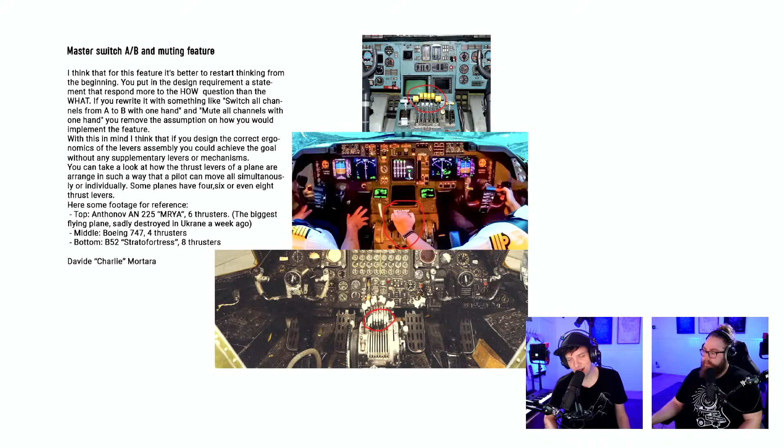Oh, so you want me to change something? Well, then let's change it for real, Martin. I'm like, in the color grade, the video is a little bit dark, and what I get back is a digital white image. Yeah, okay.

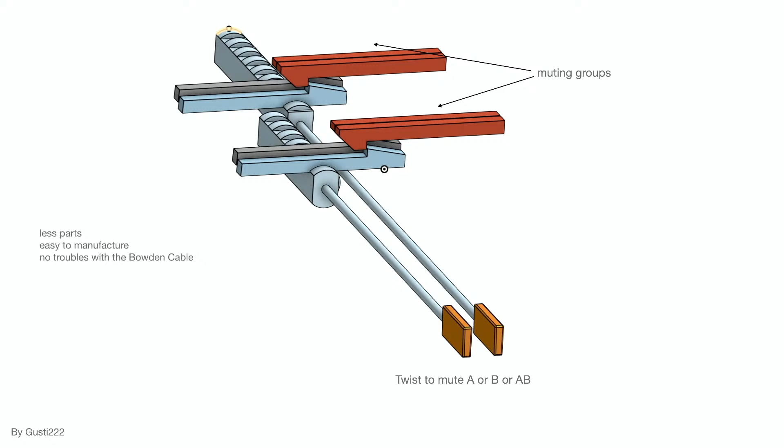From Gusti: twist to mute, A or B, less parts, easy to manufacture, no troubles with the Bowden cable. So Gusti, okay.

So this is an idea for how to do different instrument groups. What is missing in this idea, Gusti, is that we have at least 5, probably 6 individual groups. So your sketch has only 2. So when you start to put in 5 or 6 of these next to each other, you will run out of space quick.

And if I see it correctly, the genius thing with going into the middle to twist them is that everything can be on one axle. So in your design, you would need like 6 different axles, and the pivots would pivot on different parts of the links. You can already see it on the closest one that you're pivoting further back, which means every link has to have an individual design. So it's actually kind of harder to manufacture, I think, because they're not...

One design tenet that I think we should hold to in the Marble Machine 3 process is to have modules that can be repeated, the same part everywhere. And this would require custom parts, plus the fact that here the levers has to be physically connected at exactly the orange rectangular block point. So with the Bowden cable, we can put the levers anywhere. But still, I think your suggestion would definitely work, but I still think Bowden cable is simpler.

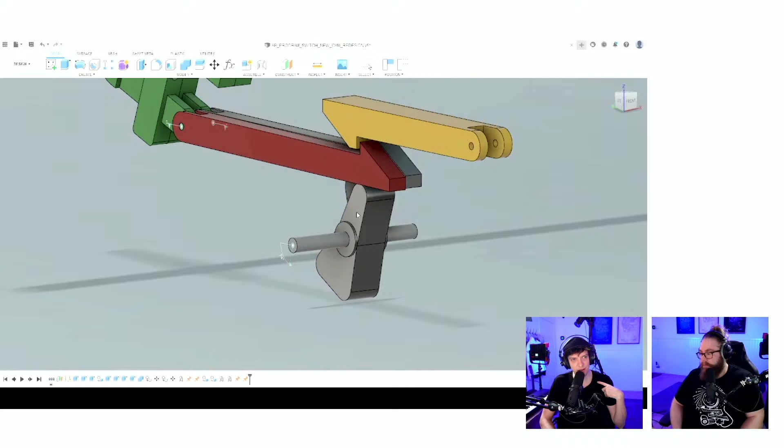So here we have the muting, and this is a video I think which is really nice. And they put, if we see, they put the A-B state on both sides. So there was a slide before saying there's no A-B state on a quick state. This is beautifully made in Fusion 360 with, I think, what is it called?

Contact sets. I love these animations when you're down, you have this person - who is it from? Sadly I don't see it here. Anyway, Golden Star, Gretzky Hall of Fame, brilliant. Because this person has downloaded the latest CAD from our website and animated something that helps me think. Very, very appreciated, beautiful. And this looks maybe like it's from the same person. Oh yeah, it's the same design. It's brilliant.

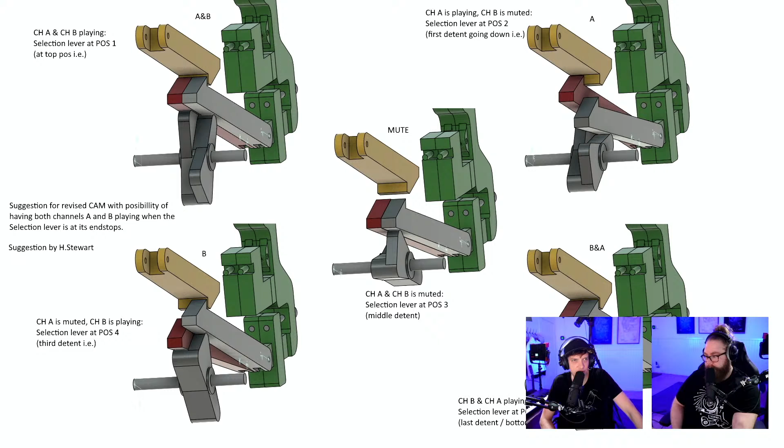Inside cam for car handbrake, lever to engage with to push either to A or B. Inside cam for car handbrake. So where... I don't really understand where on the machine this would sit, and if it's connected to the shaft of the cam or if it's a Bowden cable.

Jack Hainsworth - I mean this is beauty, it's a beauty. If the master lever has a larger range of motion than the separate levers, and the spring to return to center, it will not get in the way of the other levers.

The point here is that the master lever has to work so that when I want to individually switch program for the bass or mute the bass, the master lever can't obstruct that. This is a great clarification of that.

Gear, cable, axle. Here we come to the thing that a cable can't really push. Perhaps a hydraulic Bowden cable could. I've lined up our next live stream to discuss Bowden cables. I don't know how a hydraulic Bowden cable works or how expensive it is, so this idea would perhaps work with a hydraulic cable, but not with a metal cable inside a Bowden cable, because on a bike brake, the thing that makes the cable return is a spring that pulls the cable. You should always pull a cable, not push with it.

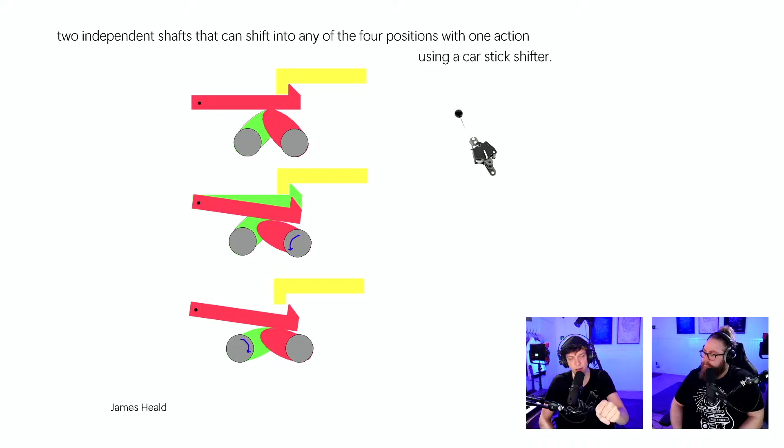If I think of a gearbox of a car, you have to think about what you put in. I think having one lever that goes back and forward and rotates two different ways is so easy: program A towards me, mute in the middle, program B all the way forward. I can go immediately from B to A, from A to middle, from B to middle. It just feels more straightforward.

A bigger radius enables different states to be closer - this is a super good point that's been made. What I mean by closer is that if you look at the blue and green lines, the angle is less, which means on the right side we need less rotation, less travel of the Bowden cable. Awesome illustration. Drop ball to mute, springs to center lever.

So this is the same - we need the tri-stable position, and it's a spring-loaded ball that clicks in place. We're using four steps, and this user has correctly put 'AB?' as a question mark. If we go to my iPad quickly, you can see Gretzky's suggestion. So AB is a big question mark.

I honestly do not think that we're going to allow the AB state. Let's go back to the sketchpad quickly - this is what we call a known unknown, and this is the topic of the next stream.

This is a known unknown that we have to deal with: AB state. If someone doesn't know what it is, let me make a quick demo on the keyboard.

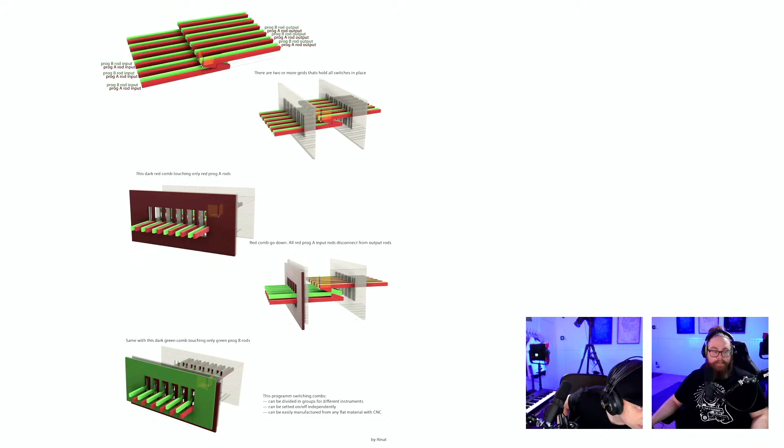Thank you so much. Okay, I have this one. Here we go. Ooh, can you make it larger? This dark red comb only.

Okay, the grids hold everything in place. Sadly, I can't enlarge it for you, my friend. Dark red comb touching only red prog A-rods.

Okay, so now I see your suggestion by Rinat. Cool idea. However, the genius of the Marble Machine X design was that this link, all these red and green ones, were only resting because of gravity, which means it can be pushed up by the action. So if the levers are resting inside the grid...

Because it looks like you're pushing them down, and then in the edge cases they can't - basically when you unmute exactly when a programming pin has activated a thing, it will get stuck, I think, in your design, because it can't swivel since you're pushing it down with the grids.

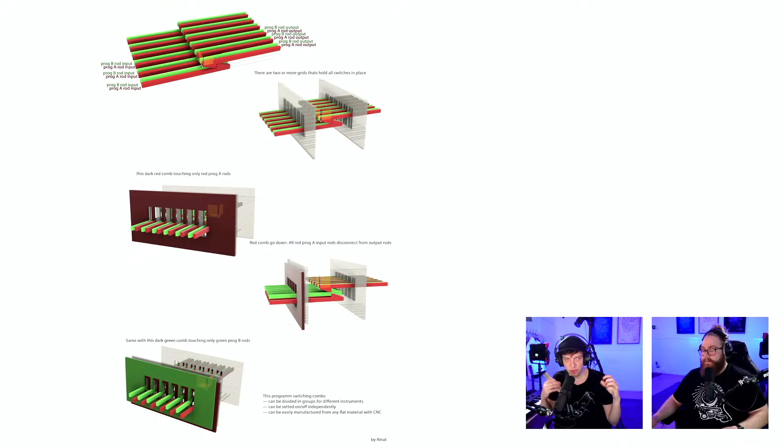So I think also it's more difficult to make this go up and down. Plus, when we want 5 instrument groups, there is no space between the instrument groups. We need to access it from the middle, and for your grids to keep together, it needs the side walls. That space does not exist.

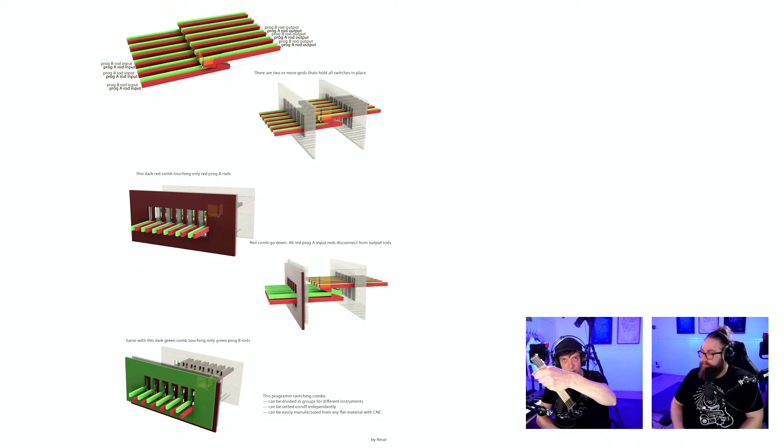I think actually your solution - if you remove the things on top and on the side, and if you only pushed from below with your grid idea, sliding up and down, this solution would actually work equally well as the camshaft. But I think it's harder to make one lever movement have 3 states, because the rotation gives us the 3 states, whereas otherwise I'd have to pull the lever, one thing has to come down, and then another thing has to slide up.

So there's 2 levers for AB. I think the one we have is simpler.

Do you understand it, Hannes? I can sketch it. Okay, or maybe you understand it. I understand it. Okay, I'll sketch it for the viewers. Do a quick one - 5 levers.

These are the instrument levers and the master lever. And instead of having these arms like this, the suggestion is to make the arms in here. Yep, and that would look more magic, because there's only 6 levers, but the last one is moving all of them. I love it, cool. Only thing is the master lever has to be chunky, because it's gonna take a lot of turn. Let's see the next design.

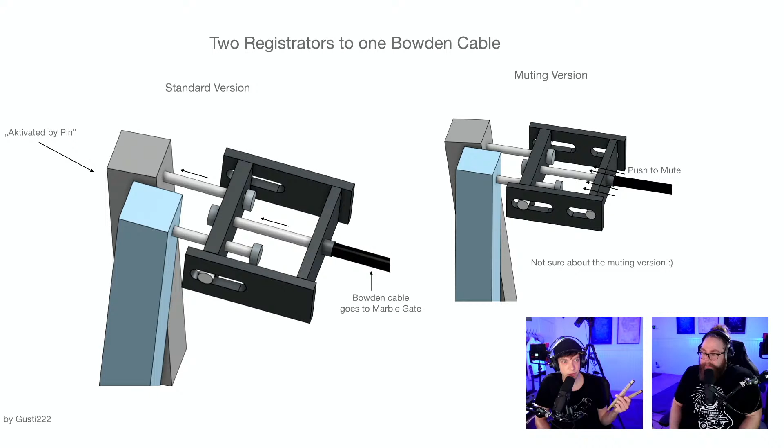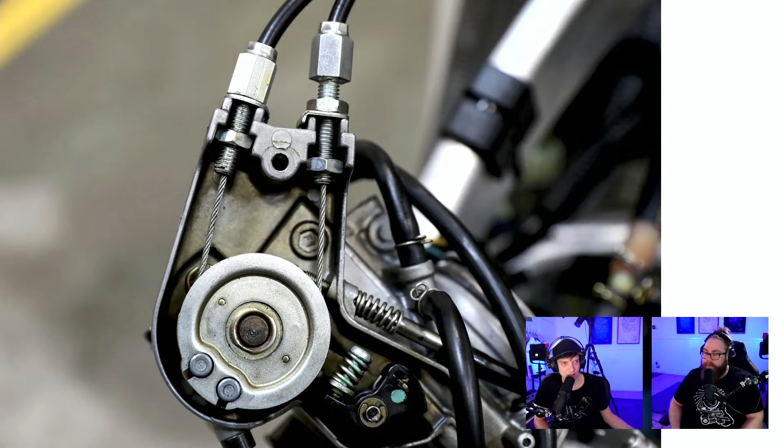Those are my favorite. Play A, mute both. Play B, play both. Okay, beautiful sketch with the yellow, but we have removed the play-both state. Mute both, same here. Love the sketches. And this one we saw, this is the MC throttle and the wheel.

Spring tension bar guided by a housing, channel on each lever with crenellations for indexing it. This puts the indexing a little bit further out, which I kind of like.

By rising or lowering the shaft, you can return to the same. I'm not sure I'm understanding this idea. Spring tension bar, guided by a housing. Do you understand? No, sadly.

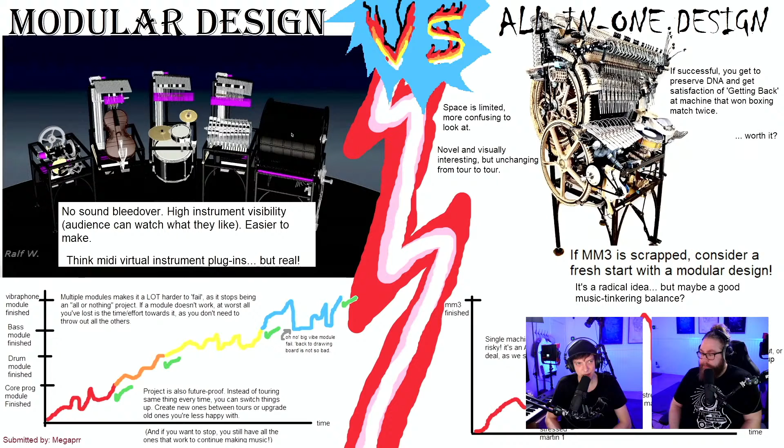I think the machine would be quite high, but it's a good way to get more room. Oh wow, here we go.

Mega PRR has made the most epic comparison between modular design and all-in-one design, and this is exactly where my head is, so I love to see some input on this. And there's a lot of text, but I think there's a lot of work being thought behind here. So let's start: modular design versus all-in-one design. On the modular side: no sound bleed over, high instrument visibility, easier to make. Think MIDI virtual instrument plugins, but real. And then we have a little graph.

Multiple modules makes it a lot harder to fail, as it stops being an all or nothing project. If a module doesn't work, at worst all you've lost is the time and effort towards it, as you don't need to throw out all the others. So to the left, you can see the different modules being finished. The project is also future-proof. Instead of touring the same thing every time, you can switch things up, create new ones between tours, or upgrade old ones you're less happy with.

So at the blue line, oh no, big vibe module fail. Back to the drawing board is not so bad. And if you want to stop, you still have all the ones that work to continue making music. It's super interesting to hear your thoughts about this.

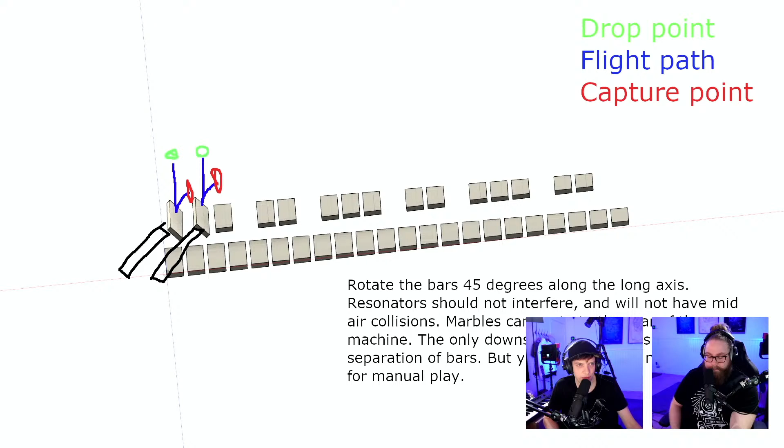It's getting a lot of traction out there. Drop point, flight path, capture point. Rotate the bars 45 degrees along the axis. Resonators should not interfere and will not have mid-air collisions. Marbles can route to the rear of the machine. Only downside I can see is slightly wider separation of bars, but you can keep the normal layout for manual play. Drop point is green, flight path is angled to the side.

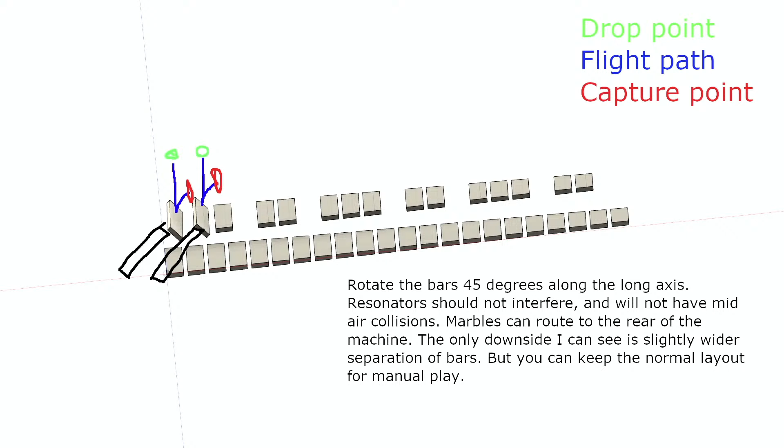Tricky part: how the vibrato shaft that goes through all the resonators is one straight shaft. How do we build the vibrato shaft? That's the trickiest thing with this design. Here, I think, is from Gonzonator, right?

Cycling the tempo would be one of the easiest ways to feed the tempo perfectly. Sometimes at the gym I do this cross trainer in time with the music, and I try to put one handle on the snare drum. I think this would actually work, but it's too much circus.

Exchangeable vibraphone section, including note plate and resonator pipes.

Yeah, the modular design is another thing. It might be less interesting, but it might be better music and definitely better sound. The modular design allows us to separate the drums away from the vibraphone, which will be wonderful.

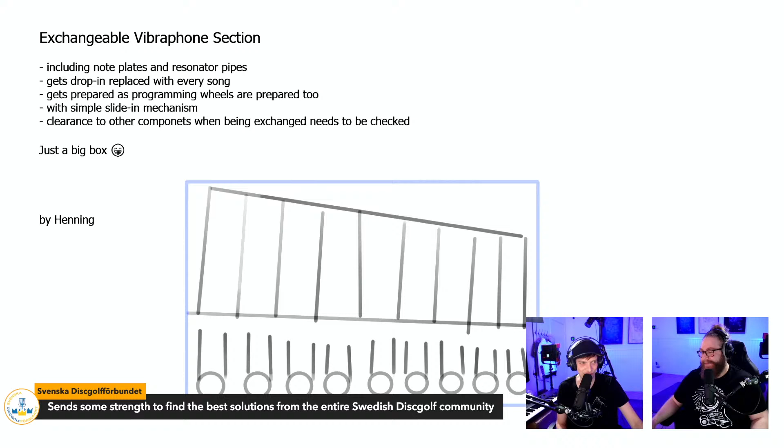Martin, here's a beautiful comment for you: Svenska Discgolfförbundet. Wow, so this is cool. The Swedish Disc Golf Society sends strength to find the best solutions from the entire Swedish disc golf community. I competed at national level in par SM once for Slottsskogen Disc Golf Club, and I was eaten like the goat in Jurassic Park by these players. I think I had a single match against someone who took European Championship silver, and it's super fun. Disc golf is just the best sport of all, so super fun to see you here. So nice, Swedish Disc Golf Society.

Exchangeable vibraphone section.

My mental game in disc golf was not good. I could do good in practice, and if I did well in a competition round, I just got locked up after half the round and threw the disc into the forest.

Okay, so this is a Mandracule module, exchangeable vibraphone section, including note plates and resonator pipes. Gets dropped in, replaced with every song, gets prepared as programming wheels are prepared too, with a simple slide-in mechanism. Clearance to other components when being exchanged needs to be checked, just a big box by Henning. This is a super good idea. This is what we call the Mandracule module.

Let me hang on, I'm going to find... not yet, but I am going to find our decision matrix. Some of you might have seen it. Let me... so it's, of course, in here.

So here we go. Your solutions are all these. See if I can get it a little bit bigger. Yeah, like that. So this solution is referring to all these Mandracule module things here.

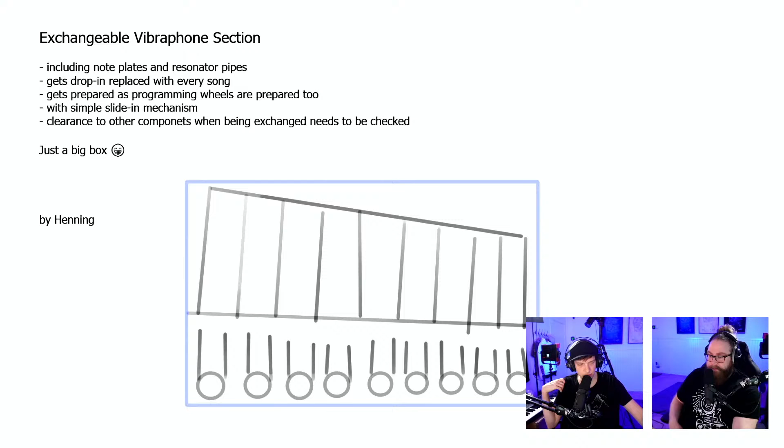I want a music instrument that can play. I want to make a real vibraphone with full musical expressivity. But I think I've realized that I can't have an all-in-one solution with that design requirement. So if I decide, no, we want to beat the old machine, we want to make the classic look, then this is going to be the solution.

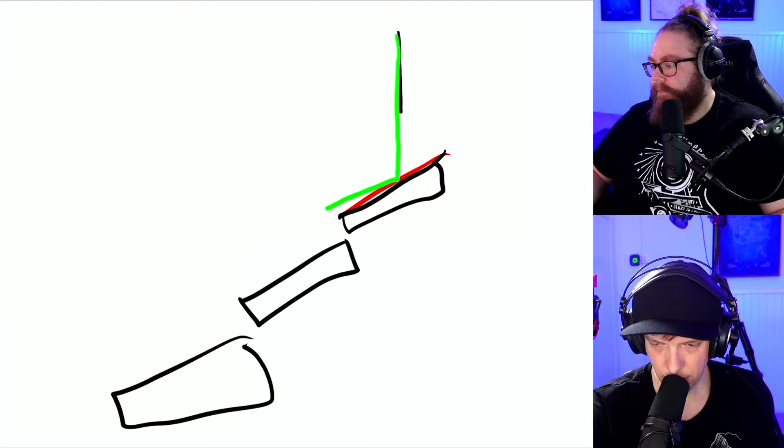So maybe let me sketch on this a little bit. I've excluded this idea from my head, and the reason is because I thought it's going to be visually too annoying. I thought about it like this, and I thought the funnels would be like this. But let's say, because we know marbles don't bounce really well on vibraphone, if we angle them a lot, and if they only bounce like this, then here it can bounce a lot on the drum.

The little catchers, represented by green, maybe don't need to be that high. So here you still have good visibility. So here is an eye. If I draw a straight line from the eye, you can see the bounce.

And if we make Sauron's tower here, Orthanc, and we'll put a little Frodo here. There we have it. Love it. Next design.

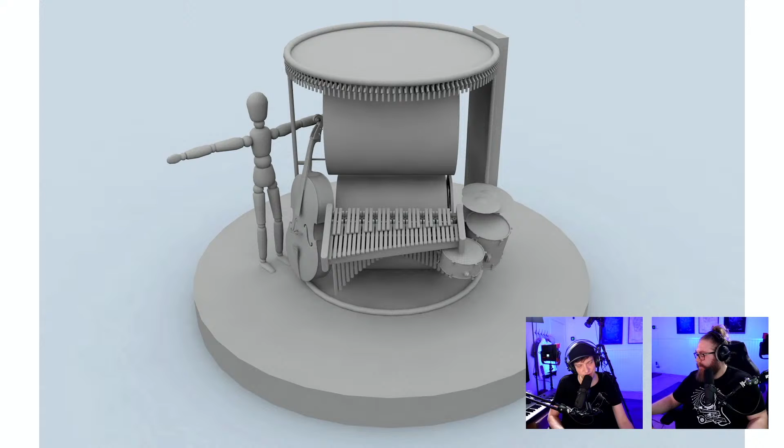So here is a rotating stage for visual impact wherever you're seated at the arena. This is a beautiful model. We featured this in the thumbnail because I love this model. It's so well put together as well. Just the visual impact of this.

I mean, it looks so cool. I don't know how it would work in reality, but the look of it is like, oh, I really like how it looks. Yeah, so when you see this, you're like, well, you do that, but there's no functionality in this model yet, so it's more form than function. But look at this, it's beautiful.

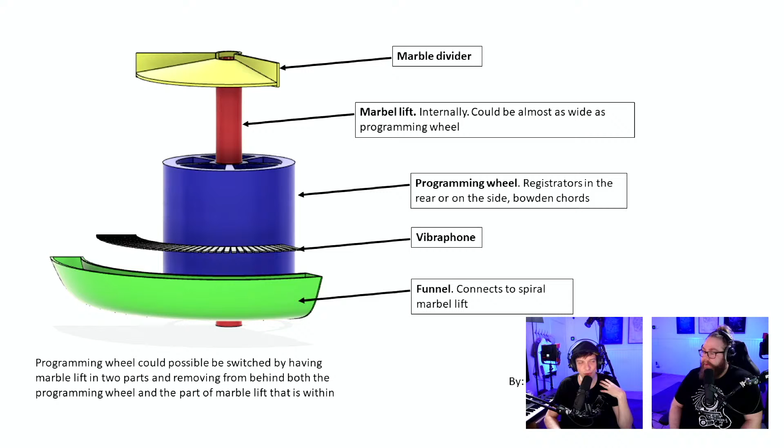But beautiful sketch. Vibraphone, frame, marimba. Have the ability to use the same resonator pipes but change the instrument from vibraphone to marimba. No, I don't like the sound of marimbas. It's the Lion King. No, it's the Little Mermaid.

So I'm only in it for the vibraphone. I don't like the marimba or xylophone sound at all.

So this is... thank you for the suggestion, though.

Drum, bass, keyboard. Vertical again, right? Yes, it's a vertical programming wheel. I think it's too difficult. I would like to see that with more of a granular sketch, so we can see more about how it would work. I don't see it working, but maybe I'm just stuck in my old ways.

Vibraphone placement to avoid mid-air collisions while keeping full range vibraphones. Extra note slots for note repetitions.

So the thing here is that you have collisions everywhere in this sketch, because I want to use 40 millimeter marbles. So let's just take the first white key up to the left, it would collide with the first gray key next to it. So the marbles are bigger than your center to center distance here.

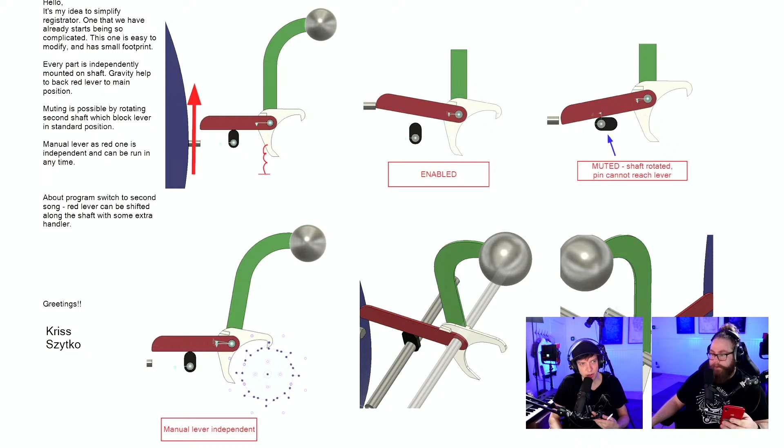So I think, Kriss, that your suggestion falls apart because you're sliding the red thing along the axis, and that will cause half hits and stuff like that. So the way we're now switching between program A and B is the only way I think that would work. But when I see your image, I hoped it would work. I don't think it would work to switch between the programs. Let's check the next sketch.

One Bowden cable enters, two leave. Ratchet and input allowed to flex out.

As the input is pulled, the cog spins 90 degrees. The lugs on the cog pull on alternating outputs every cycle. As the input is released, it is allowed to flex outwards to slip past.

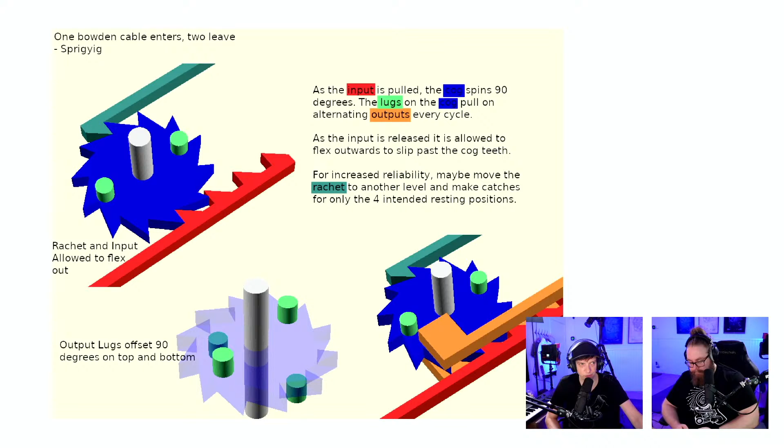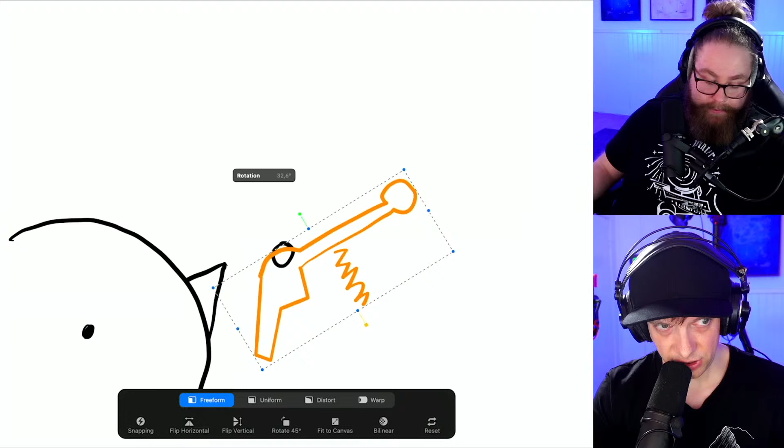So as you know, this thing, can I rotate it? Rotates like this, kind of. Tick, tick, tick, tick, tick, tick, tick, tick, tick.

Yep, I have it now. Okay, I'll take it later. Yep, because otherwise it's hard for the viewer to follow if I'm interrupting.

No. I'm in the wrong place. This is not for this. This idea is for...

This was actually an idea from the paper roll. When we were talking about paper rolls, here's a paper roll with holes, and it doesn't have a lot of force—you don't want to use a lot of force. Or the programming drum can be used as well. We talked about preloading this orange drum thing, so let's just make the drum here. Here's the drum.

So how do we preload? I'm going to make a red drum beater here, which has been preloaded with a spring force, and here it has been locked into some kind of latch. So you can pull out this latch—pull out latch equals boom, it plays. The problem was how to make this preload, but not make the preload happen exactly when the stick is going down, orange, to make a boom. Boom.

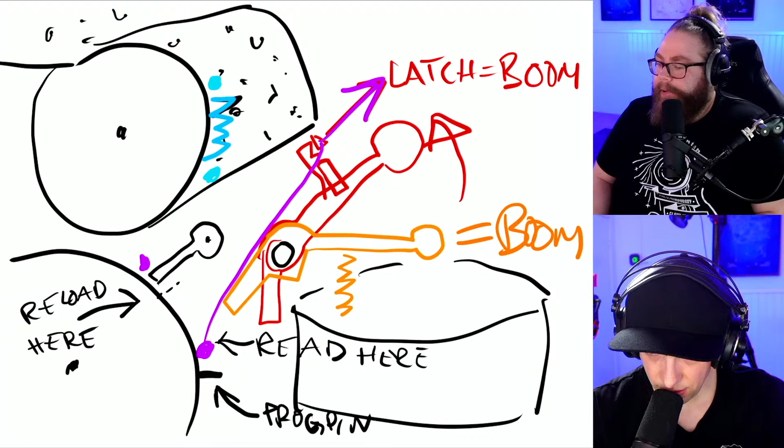Which means that—let me take a new color, purple—this reading here would pull out the latch. And this reading here would reload the thing. My sketch sucks hard, but the solution doesn't suck.

Did I make myself clear? You explained this to me prior, but I think the audience will get it. Let's see what chat says.

Let me make a custom note, because I think this is important—this has never been done, as far as I know, in the history of music. So, red programming pin is the read of the music program. Tick, tick, tick, tick. This goes to the latch that's pulled this way. Release.

Which means the stick—sorry, I run out of space all the time, why do I run out of space—the stick makes a boom. Afterwards, the same programming pin becomes orange, and it's read again. So we create another mechanical movement, and this is reload, which means the stick goes up in tension again.

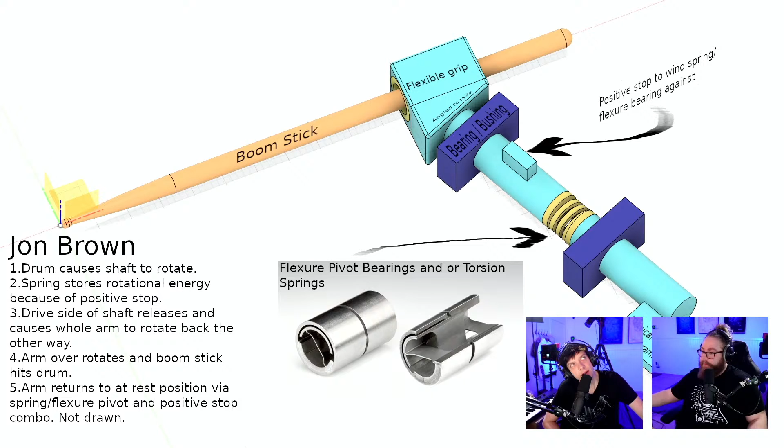Angle to taste, flexible grip, boomstick—I love the term boomstick. Boomstick. This is my boomstick, it looks greater. Arm returns to rest position via spring and positive stop combo, not drawn. So I'm wondering what the difference is here between a normal spring. Oh, that's a pivot. Robert Towell.

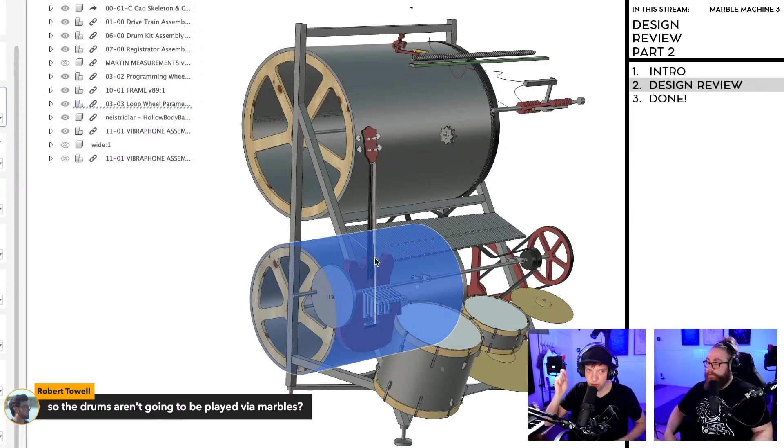So the drums aren't going to be played via marbles only—the idea is to have the loop drum. Let's go to CAD so I can show that. Robert, the drums are played both by this lower wheel in a loop that goes with 16 beats, and by marbles from the big wheel that goes 64 beats. So basically what you can do in this design is a loop of the drum, but then you can add marbles that fill in there—that was the marbles. Yeah, so both is the answer. Next design.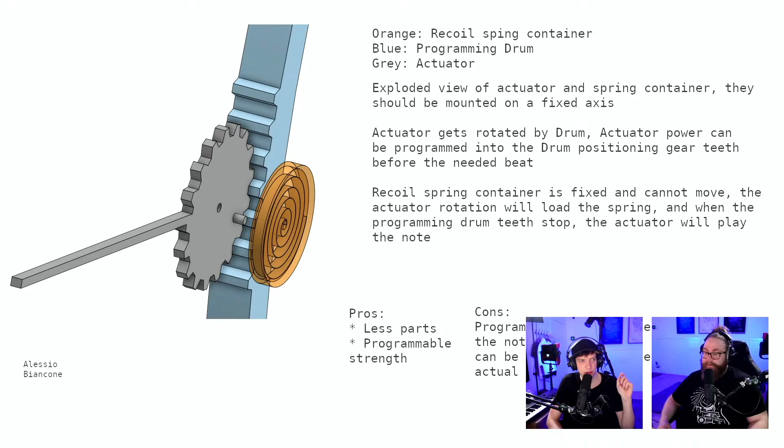It's a nice one, only one spring for both directions. This is the same idea Alessio Biancone had, with the coiled spring here, using a torsion spring or coil spring instead of two extension springs.

It's interesting - problems with current drum beaters and the desire to play dynamics, by Peter O'Neill. Sounds like a little essay. I love it. When only partially muted to play quiet, spring tension is less, the activator lever hits less on the programming hill thing, and the drumstick starts further away. These added together will cause drastically different timing.

You're absolutely right - other solutions won't work due to changes in release timing, suggested in my own head and by others on the stream: adjustable length of the registrating arm, adjustable height of spinning hills on the programming drum. The adjustable height of spinning hills is my favorite solution, but I've also been thinking - what would it do to timing?

Can I see what's written there under us? No longer the same piece of metal as the registrator - unfortunately I don't have a way to make this yet, but maybe better minds can get there. I love the humility of pointing out errors while acknowledging you don't have a better solution. Somehow this angle needs to be adjustable only by moving the starting point of the registrating arm. This will keep the starting point of the drumstick fixed and the release point of the registrating arm fixed - only the tension from the amount of pullback will change.

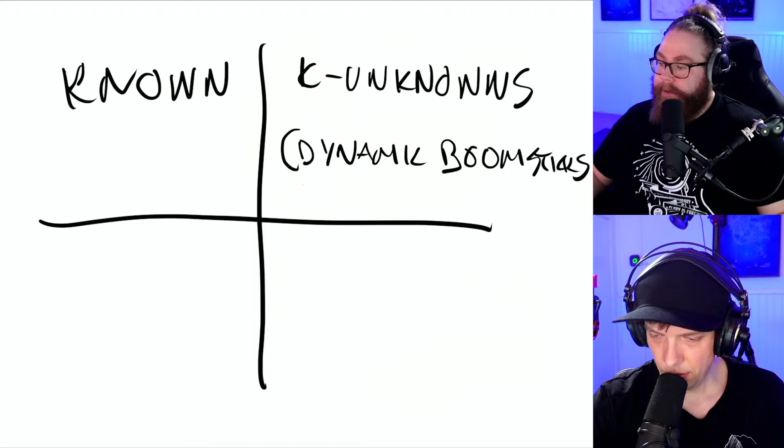This is the topic for next stream - we have a couple of known unknowns with dynamic drumsticks, as they're called nowadays. I'm happy you pointed it out, because this is something we have to deal with and think about in the next design. Lucas Wendel is in the chat: you can compensate for the difference in timing of the different height ramps depending on the way they are actually manufactured. Great point, Lucas.

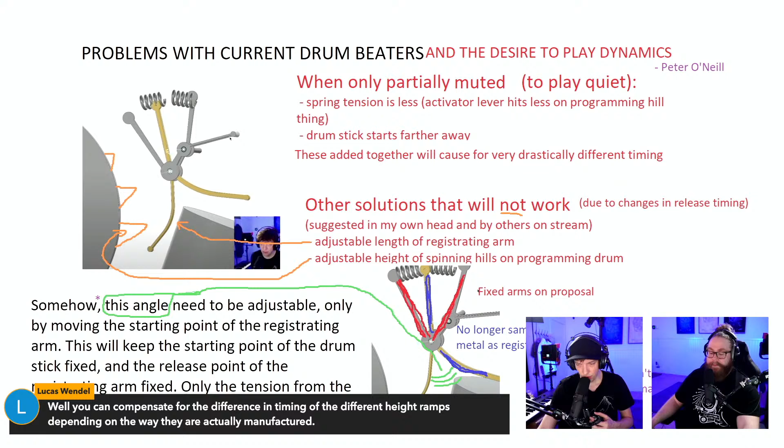Let's sketch that. Since we'll be able to know exactly - here is the exact point. You would think that someone like Lucas, being so smart, has a whole mechanical music instrument museum to derive this kind of deep knowledge from. So here is boom.

This is exactly 10 centimeters from a certain point here. Then when we want to make the soft note, the red triangle that is much lower, we can make this distance 7 centimeters from this point, and this point is the timing point. So we can actually learn the mechanical difference by trial and error, and have these triangles - on this triangle you can say like a hardness rating, maybe it says 'soft' on it, and that soft thing is shorter to offset for the slower hit. Lucas solved it, which means we can move it from the known unknowns into the known, and we're getting there.

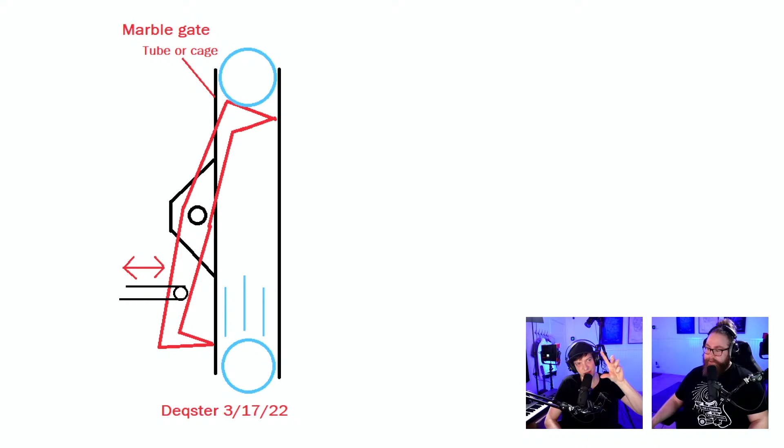I am like - no bad suggestions? Hold my tea.

Dual channel clock escapement gate. Two dropper wheels on the same escapement.

I've seen this a couple times now, from Enoch Daniels. The reason we have only 8 marbles is that Rosero figured out that leaves the marble dropping to be the most secure because of the angular rotation. On this wheel, every marble will just rotate a little bit to be dropped. And as the sign on our wall here says, what would Rosero do? So we should not mess with perfection. So Enoch, thank you, but Rosero have made it otherwise.

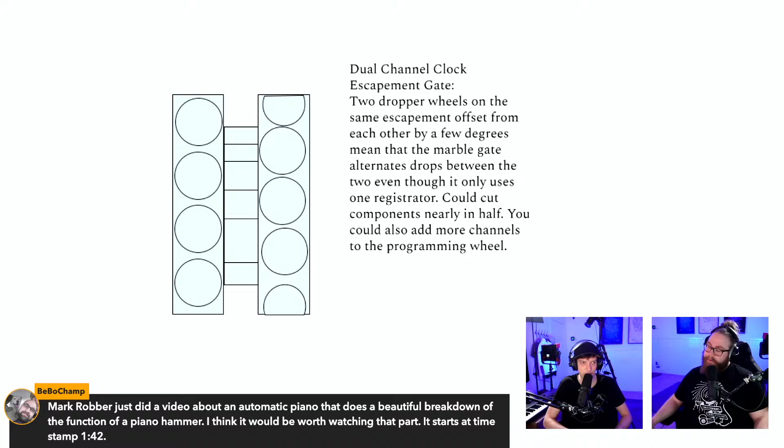BeBoChamp, Mark Rober just did a video about an automatic piano. I saw it actually, it does a beautiful breakdown of the function of a piano hammer. I think it would be worth watching that part, it starts at timestamp 1:42. Mark Rober's videos are amazingly well made. I saw the video actually, and I also thought it was a great demonstration of how boring it is with solenoids. I mean, the piano was super impressive, but just putting solenoids, it's a one-trick pony, I feel, and you get bored of it very fast. But it was beautiful, beautiful, beautiful, and very quick.

Two gates dropping on the same key to avoid doubling keys. You don't drop in the center anyways. Always open gate 1 first, fall slower than gate 2, so ball 2 cannot catch up and collide with ball 1.

Mad props for your photo editing software here. Yeah, is it Paint? Paint or early Photoshop? I don't know, it's beautiful. It's beautiful. From Induni. This is basically exactly what we're going to do. So we are going to do that.

Inverted belt drive for marble gate from timing wheel, by Jared. So I think this is an extra part. We do. Yeah, I think it just adds too many new parts.

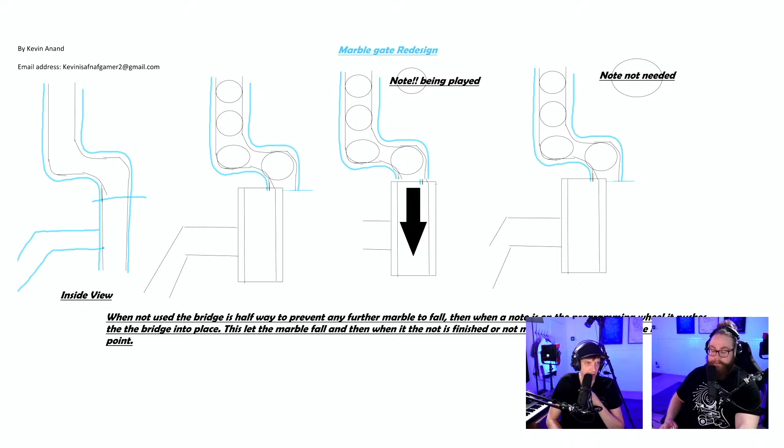This is very much what we had on the first gate on the machine. Oh, can I read the text? When not used, the bridge is halfway to prevent any... no, it pushes the bridge in place. This lets the marble fall, and then when the note is finished or not needed, it moves back to the halfway point.

Yeah, it looks like the gates that I had on the Marble Machine X. It's actually the gates that are on this image. If we go to my CAD, these are actually the gates, and as you can see, gates are not reliable. So the clock escapement gate or the Pac-Man gate are superior in almost every sense, I think.

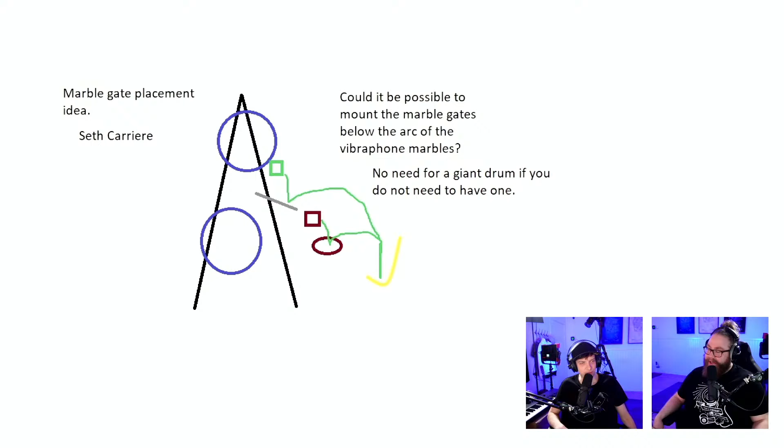Do you see what I mean? Oh, yes. Yes, please. Can we get to that zone? Everything convoluted on top of each other is causing us so much headache.

The Havoc machine. If you rotate... oh, we saw this one before. This one we checked before. Oh.

Love it. Drop caught by fabric funnel, Vibraphone backup. Drop caught by fabric funnel. This is basically exactly how I've been imagining it. And I think this is going to be so ugly, except if we make it circular. Then it would look like a beautiful ballerina skirt almost, or like an upside down mushroom.

So this is how an idea should be presented. Like I wish I could sketch this clearly. This just tells exactly, this is a brilliant idea. If we would want to do this, it turns around everything that I thought of. I had it all the time turned around. It's a great idea if we want to make the convoluted thing.

Where's the resonator pipes though? That's the thing, here it looks great, but what's missing? The resonators are missing, and they would make everything impossible. So, good idea, but I don't think it's working.

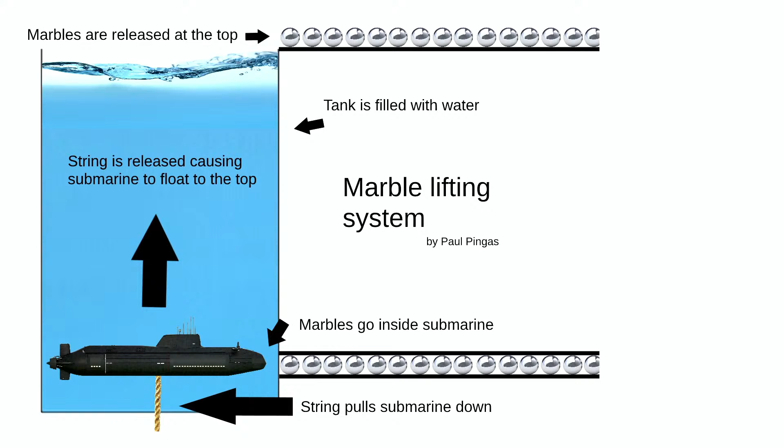Brilliant. Oh, we didn't give credit on the last image. Sadly, no credit. Paul Pingas. The case for constant drop height by Rare Earth.

So these are some mathematics to prove that if we don't have constant drop height, and if we make modules, what can we have? Constant drop height. So I think someone has done a lot of thinking here. Let me drink some water and actually go through this and try to understand.

Because these graphs, these formulas, what is it called? Mathematical functions, formulas. It's fun that the cartoons of us are smart. Hey, the smart people are back. We know what it's called. It was the cartoons who didn't know what this is called. It's called equations, okay.

I just want to once again here with all the talk about the piano hammer - Kevin Mullart, I concur with B-Boot Champ - not the solenoids, the design of the piano hammer as an inspiration for a drumstick seems like a good idea. Other people in chat are also plus one on this idea. Check out how the piano hammer works. The piano hammer has a very cool reset function. I've been repairing piano hammers on my own pianos, but I haven't thought about it for a long time, so definitely a good idea. Thanks for pointing me to it.

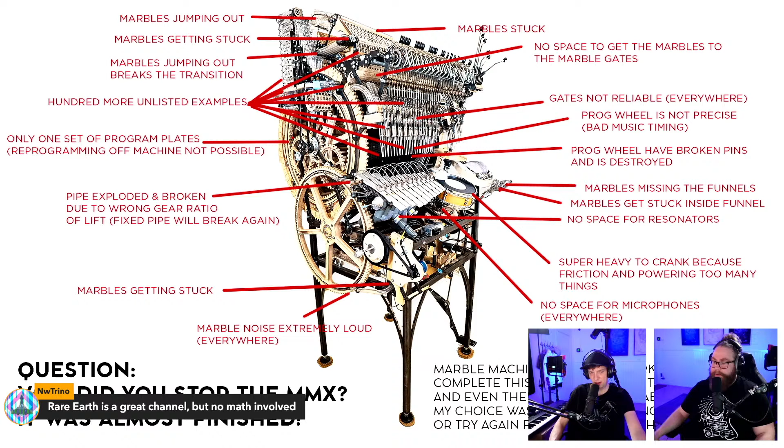So this is where this gets super, super fun. It's almost like a mathematical proof on why a design requirement should be in the design requirement document. So I'm going to just improvise here, impromptu - marble drop height.

And registrator timing. As proved, we have to rewrite this by Rare Earth. Similar, same drop height is best for timing.

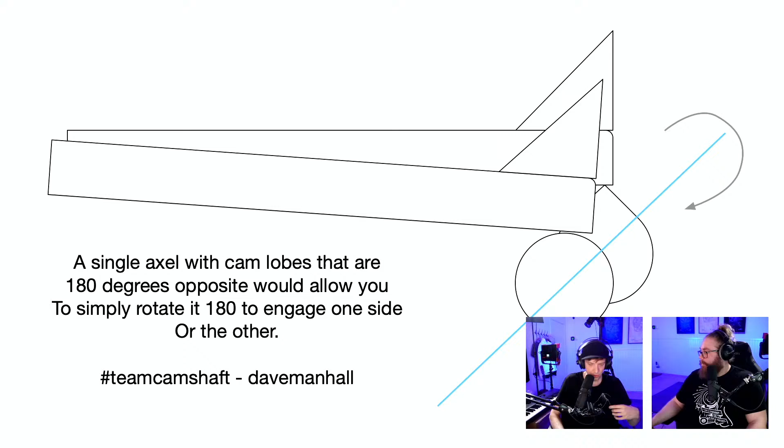I think it's a good idea. Next design: AB programs and muting. Pink axle inside holes, green one. So controlling AB channels and muting would be done by 2 levers rotating the pink and green axles at the side of the machine. This is the pipe solution, and with 6 or 7 individual instrument groups, things are starting to get too complicated. But thank you, Alienator.

Muting and track changing: registrators are always engaged, only the connection to the gate is cut off. This mechanism was in the other old machine. Each track has two registrators for changing the music.

From Inuyasha, shoof - like Gretzky, skating where the puck is going. This is exactly the solution we came up with, and you reached it independently. I'm super impressed, this is the solution that works. Well done. There's more from Inuyasha.

While unmuting, the gate connection comes down but does not transfer movement - yeah, this is the same solution. I'm super impressed that you got it. Muting and track choosing, it's the same.

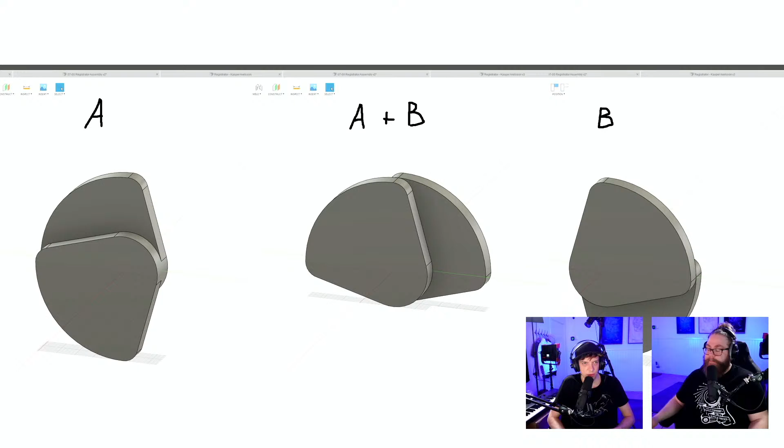Here we have more camshaft things with the AB state that we've now excluded. But thanks for the sketch.

Here we have a Bowden cable lever, I think, for overdubbing. This is how the cable goes back and forth.

Square bar with identical cam profile, stacked and rotated depending on what channel it corresponds to. Love it, easy to manufacture. And it's from a Swedish person, I think, because you can see some Swedish on the box. So thanks from a fellow Swede.

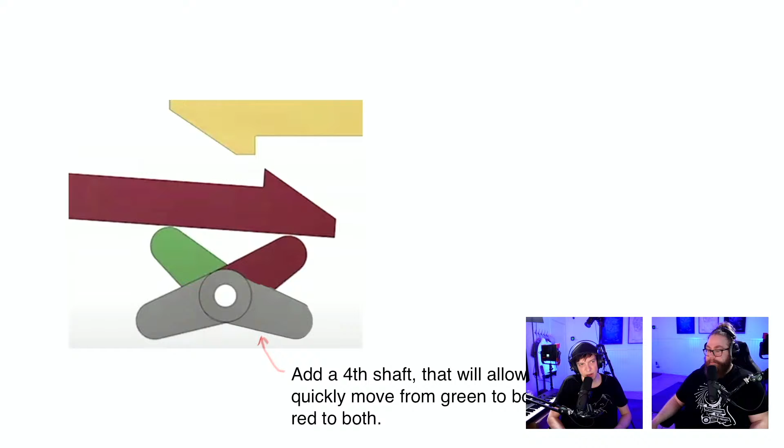Add a fourth shaft that will allow you to quickly move from green to both, and red to both - so the both state has been cancelled. We don't need the green parts here in the picture, but it's a good idea if we need that state.

Oh, it's a video, I think. Okay, let's see the video.

I love when people are using Lego. What? Beautiful. Also, this is the train thing.

Wow, cool, it's the master lever thing. I love the straightforward examples - you have an image immediately after. Thanks so much for that. There you have it, master lever levers. Beautiful demo, thank you so much, whoever it was from.

Channel 1 playing, both channels muted. Channel 2 playing - how is this? Channel 1 playing.

Oh, they cross each other. That needs two pivots, more complicated, I think.

Did we see this before? No. Use a detent to give feedback on the rotation - yes, that's the ball, that's to make the lever stay in the correct position.

To determine the muting state of what is playing, use a machine rod shaped such that its rotation determines whether B is muted. Yes, I think this is spot on - this is what we're gonna do.

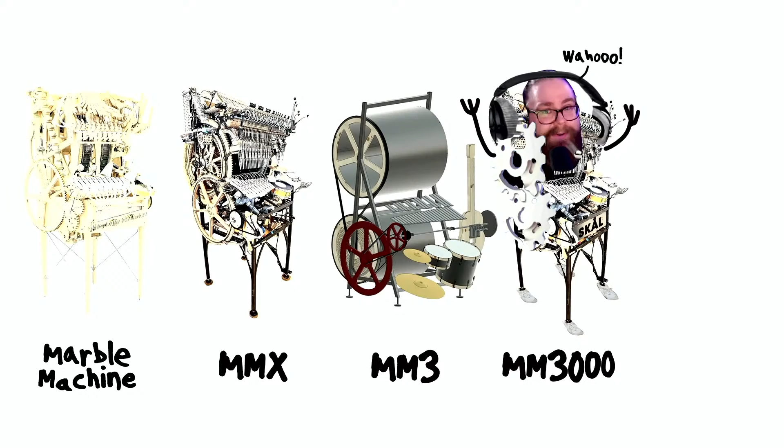Oh wow, how did this slide manage to get on air? I don't know. Everyone knows that the best way is to have MM3000 just spitting out the marbles at the correct place. And it also says Skål on the front. Wahoo, Marble Paths, previously. Let's see, this is a beautiful sketch. Can we remove we ourselves? We can.

Splitters and mergers caused issues and added complexity. Lift limit notes count, marbles hard to catch. One lift per gate, no splitting or merging. Reduce the height to the minimum to play the note. Pros: increased reliability, high marble throughput, compactness.

So my take on streamlining the design and removing parts. Bonus cool points for you if you can make a one-plate gate and lift assembly. One-plate gate and lift assembly.

So the idea is to have isolated loops, which means that the bass notes only go into the bass marble lift and the bass marble gate. So you have isolated ecosystems. Snare marbles go to the snare. The only problem with this is that you have to catch them accurately. If I play this note, it cannot be caught by this funnel which is next to it.

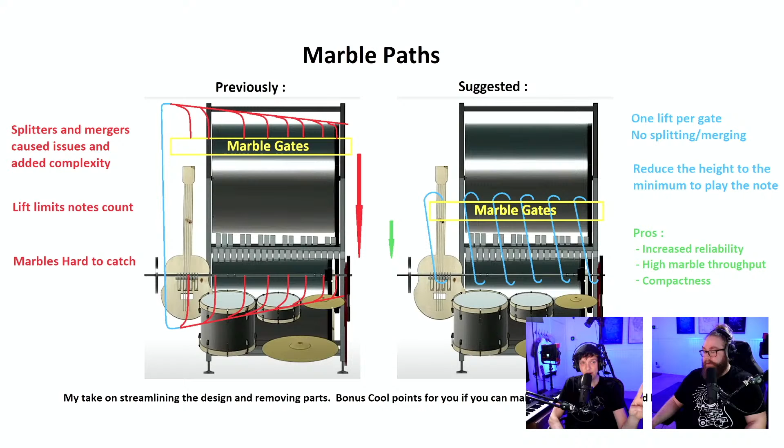So my idea for the Marble Machine 3 is to only have one large funnel, and then we need the marble gates. But on the project we've been working on during the break, the Marble Machine Maker Kit, we tried to have isolated loops, and it worked really good. So it's a good idea, but it takes - the lifting system will be much larger, and the capturing system needs to be completely exact.

We have to catch each marble into its specified marble funnel. That's difficult. I just want to say, Doro doing the Lord's work here. When people understandably question why the MMX was not pursued anymore, Doro pointed those people to this link. Please have a look at wintergatan.net pages and MMX. There you find the explanation why the MMX was not ready for performance. Great job Doro, thank you so much Doro. And at Kvijung, we really understand that people are wondering, so I made that picture exactly for you. Go there and you'll see the explanation. Yeah, some of all the problems.

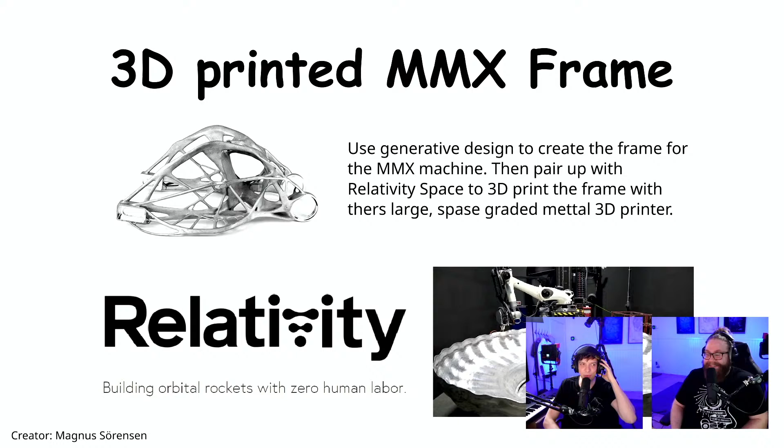That's not all, no, not those that fit in one picture. So here's a suggestion for a mini camera for video, and here is a suggestion to use a relativity space to make it organically created. It's from Magnus Sörensen again, who had another suggestion earlier I think. So these are space grade metal 3D printer parts, probably super cool, but very, very custom and a little bit nervous about probably not really cheap. Repairability and maybe a little bit expensive, but metal 3D printing is the future, guaranteed.

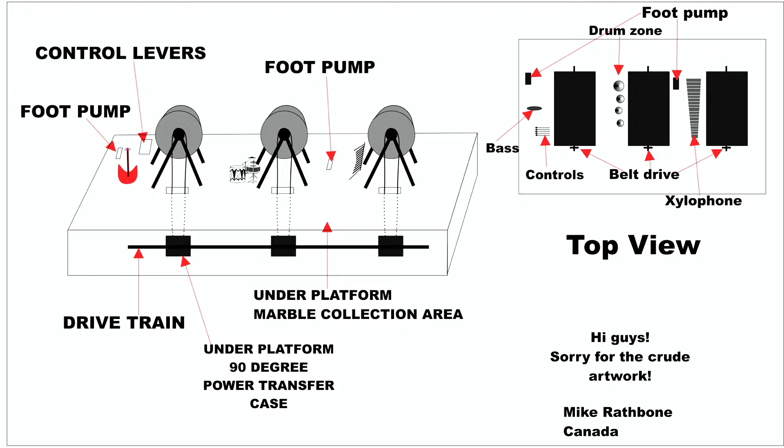So Mike Rathbone - hi guys, sorry for the crude artwork. Your artwork is beautiful, I have one big criticism though: xylophone, we're not playing xylophone, we're playing vibraphone. What was the name again? I missed it because we're over it now. Mike Rathbone, yeah, love this sketch Mike, thanks so much for sending it. And I mean, talk about visionary thinking.

And so the shaft that connects all the machines, you could actually have it above in the air as well. Super, super cool. And Ralph is here yet again with this wonderful modular thing.

Okay everyone, we are going to a smaller problem, but one of the most inflammatory ones. So Damián Vila has made a beautiful presentation of this totally overkill programming pin, suggesting instead of removable pins, using integrated pins with latching mechanisms, like a retractable pen.

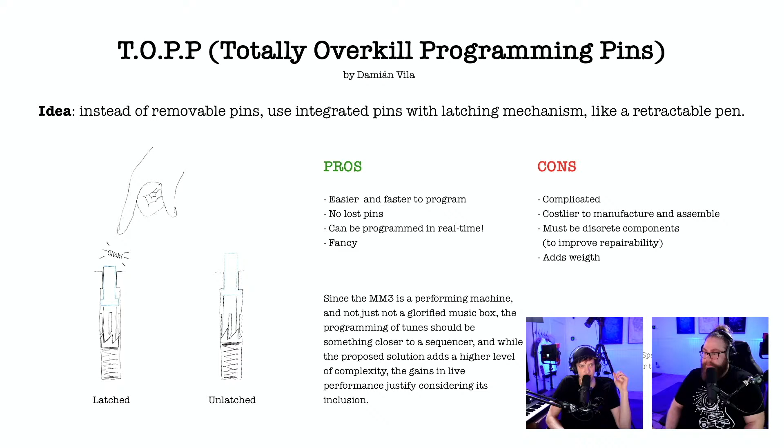The reason this doesn't work is that we need 50,000 instances on the programming wheel. The concept is brilliant, but it will be way too hard, right? There's just too many, they can't fit physically on the machine, and 50,000 of them, etc, etc.

With a programming wheel requiring cutting to program it, it is harder to experiment. Oh no, that's not true - when we do cutting, we can put a pin anywhere. So the cutting is just a template, it's a white sheet, so you can make any kind of music.

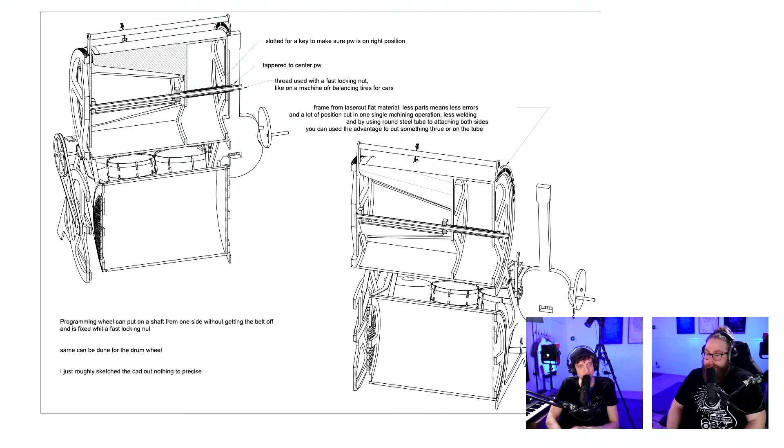Here we go - mechanical means no electronics, so that goes away. But thank you for the beautiful sketch. And this is beautiful.

So is this still the removable programming wheel, or is it moving sideways? The programming wheel can be put on a shaft from one side without getting the belt. Same can be done for the drum wheel. Yeah, so this is the old design - we've moved forward from this. We're actually removing the gear with the programming wheel.

And here's a cool kind of thing - a programming sheet, so we're not doing... oh well, this is great. This is a template made from a durable material like Tyvek and printable on a large format printer to aid in programming songs. The sheet is relatively inexpensive and you can have multiple copies in case one is damaged, lost, or given as a souvenir.

Sheet registration feature on drum - this is from Robert Thompson, Fort Collins, Colorado.

There's going to be a South Park concert in Colorado. Sir 3K just informed me, with the band playing the South Park theme song. Yeah, so if you're in Colorado, maybe check that out. I think it was in Colorado. It should be.

This is exactly how I'm thinking that we should use it. So this is just for the programmers to know where to put a pin in. The sheet can be automatically generated with software from a MIDI stream. Manufacturing requires cutting each hole.

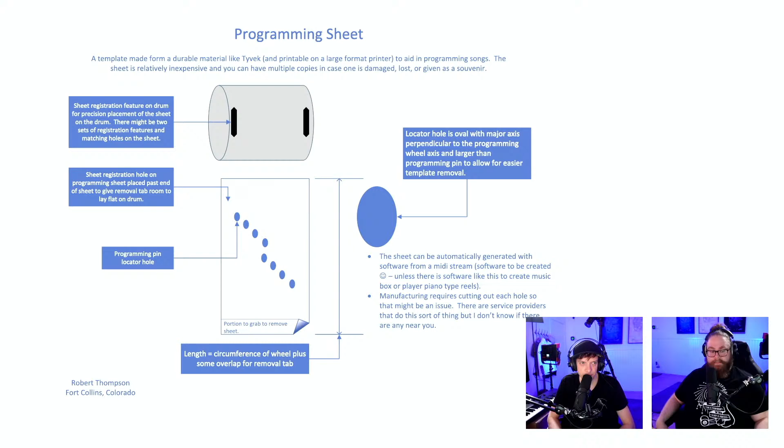So what I think is that you can actually make this on the CNC machine with a rotary axis. We saw this before from Stephen Clark from Switzerland - programmable elements, so these are the Dragon Slayer plates. I don't want to do them again. Programmable elements, so not the entire thing, right? Yes, these are the four sections.

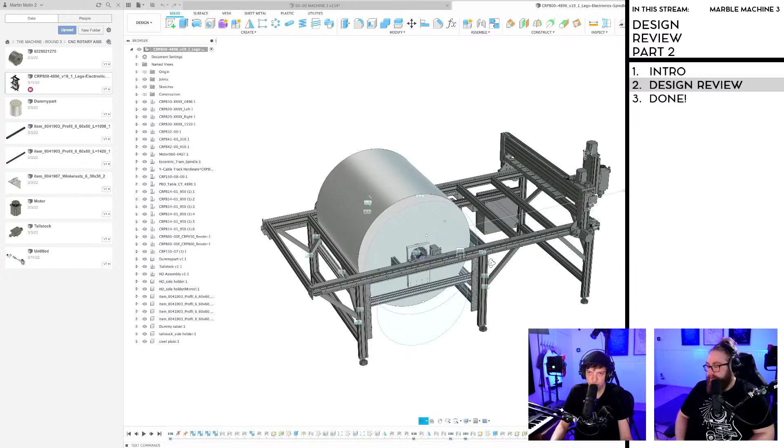Maybe with the rotary CNC machine, maybe I shouldn't be too quick to judge this idea away, because of course it would mean... let me go and open this. Heyo, here we go, there we go. So with something like this, I think these sections that you're suggesting can be made much more accurate than the sections I was struggling with.

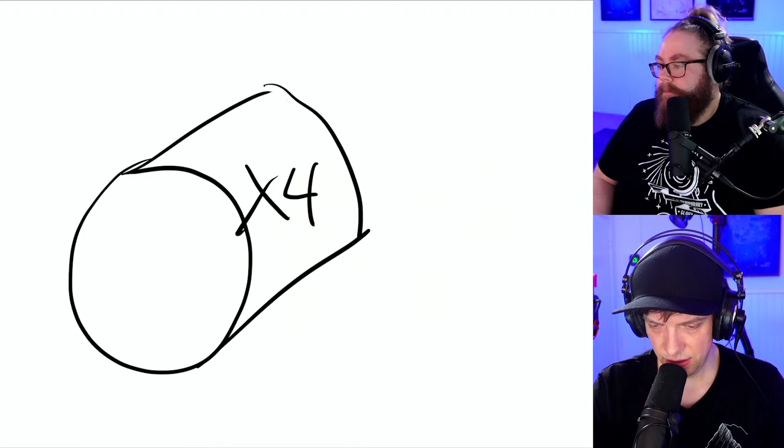And then they could also be made for the loop wheel. So if you're just thinking, we're down to trade-offs again. If we're just thinking about touring with 4 of these with full structures and gears and everything, and they are huge, or we have the templates, we have the skeletons on the machine, and we're just touring with a whole stack of half moons like this.

The precision I want for this wheel - we have to be able to snap these on and off, and we can't have holes in the edges between them. I agree, we're gonna have big trucks. Rammstein takes flame effects like 30 meters high to their concerts, and I'm planning to play at least 1/100th the size of their arenas.

Flexible removable programming plate - Flexo printing uses a system like this. Perhaps it's possible to create a flexible programming plate that attaches to the rotating tube, so you could create several songs on different boards and only change them as needed. It would save a lot of space and speed up the change process. All the best, from a Brazilian T.

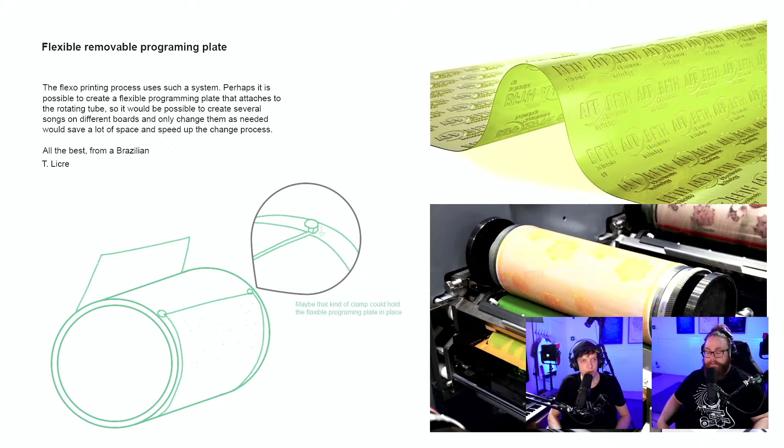Project management - nothing there, so moving on from that section, and the audience is sighing in relief. We don't need anything from project management on this channel.

What is an Acme thread actually? Is it a bigger thread? Can we Google that? I can Google it quick. You can Google it - I'm locked in here, you have my keyboard as well. Yeah, I do - Acme thread. Oh yeah, it's a bigger thread. What does Acme thread stand for? American screw thread - oh there we go. No, American, wait. It's another kind of threading. I think it means it's more like a machinist thread, I think. Oh wait, here.

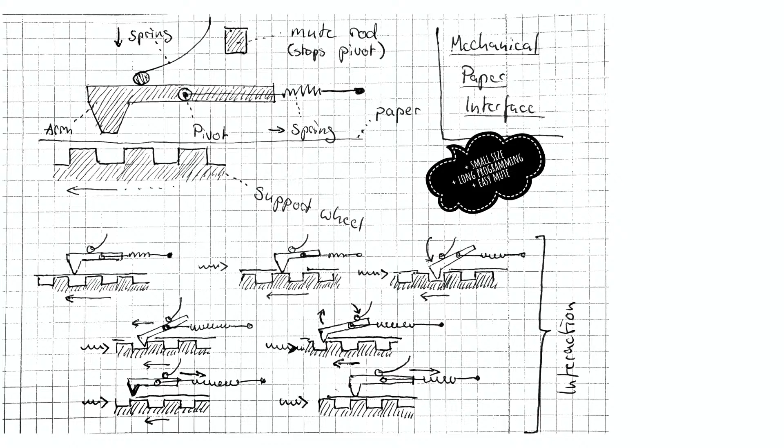Small size, long programming, easy mute interaction - so this is a cool idea that I haven't seen. Okay, so it's worth explaining for the viewers: when the paper is not strong enough - this is something I also think has never been done in the history of mechanical music - so the paper is weak, but to help the paper we have matching holes rotating underneath. So the little lever falls down through a hole in the paper, but is carried forward by the teeth in the programming wheel beneath. It's this beautiful solution.

I've seen it before. I think what would happen though is that all the registrators would slide on the paper, so it would make a big sound at all times, because they'd have to have some pressure down on the paper to fall down into the holes. But it's a super cool solution. We're not going to use paper, but if we do, something like this could save us.

Cypunk215 teaches us Acme literally means the highest. It's a common name for various businesses in America. It's also where the coyote buys his devices to kill the roadrunner. And their Acme threads are strong, changing rotary force to linear force, as seen in a vise from Mr. B. Fox, 1775. Wonderful.

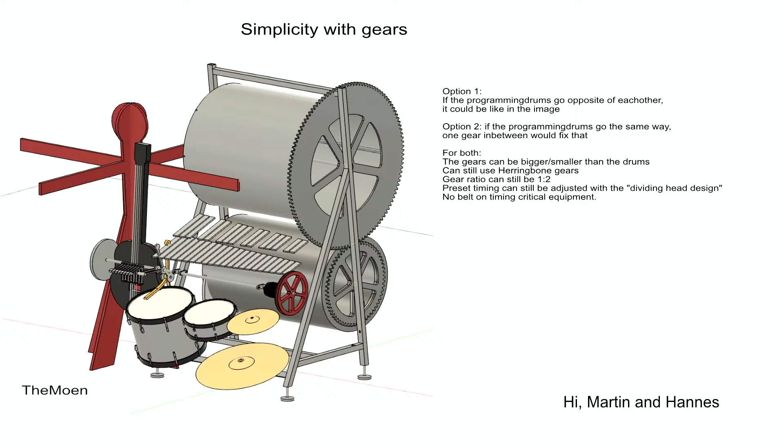I'm Martin, and honest, TheMoen, I have to ask you - do you think a belt has less accurate timing than gears? Because I thought this was impossible, since I wanted the loop wheel below to have a 1 to 8 gear ratio from the crank. Now I actually want it to have a 1 to 16, which means we only need a 1 to 4 gear ratio between these 2 drums, which actually could potentially work. So your solution might be viable, is what I'm saying. And I've been thinking about maybe taking back the herringbone plywood gears, so I'm curious why you prefer them over a timing belt.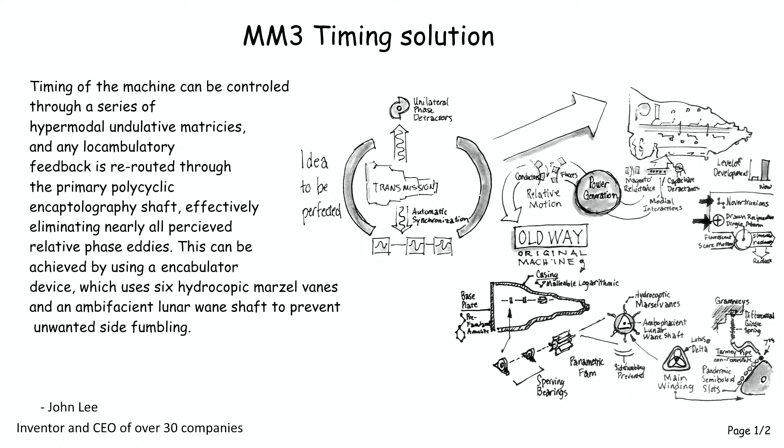Woo! John, you have to translate this to English for me. Super cool, John, to see that you are - let's see, there's 1 of 2 - oh yeah, maybe we can come back here into frame. Lunar wane shaft prevents unwanted side fumbling. Wane shaft and moon gears goes in here, connected to program wheel, earth gear. So there is rocket science here. Wait.

So John, CEO of over 30 companies - I'm only CEO of over 1 company, and I guess I have to learn some new words. This was impressive, and the sketch is a total beaut, right? Yeah, that's super cool to have you here, John. It's way over my head, your suggestion, there's too many words that I have to learn, so is it possible to dumb it down? An idea to be perfected. And I'm also curious, like, where all the way... original machine. So what I feel with this suggestion is there might be some geniality hidden in here that I'm not grasping at the moment.

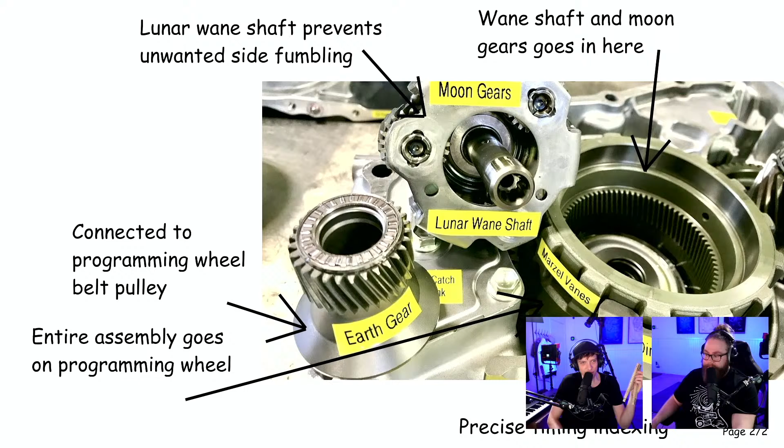MM3 timing solution, level of development. And you get so much into the sketch. So, okay, let's see if I can understand this. Wane shaft and moon gears connected to program. Entire assembly goes on the programming wheel. Is it kind of a gearbox? Marzel vanes - there's so many words I never heard. But super fun to get your suggestion, and wish you good luck with your 30 companies, although I don't think you need it, it sounds like it's going pretty great.

That was pretty hard to understand, but something that's easy to understand is that we have the best community in the world. And this is from Mikkel Antila: Martin, the MMX might not work, but the journey was such an inspiration and gave me so many tools for dealing with creative projects. Loving the new format and new journey, always inspiring - and a heart emoji. And a heart emoji right back at you. Thank you so much for your support, that's wonderful. Thank you so much, Mikkel.

It's really nice to hear that me trying to do something, even though I'm failing, has given some value to others. That means everything, so thank you for that.

We have an explanation of the sync solution because I asked for it. So the inside thing adjusts the tension and the outside thing adjusts the sync. Thanks for explaining, Pedro, now I understand this sketch.

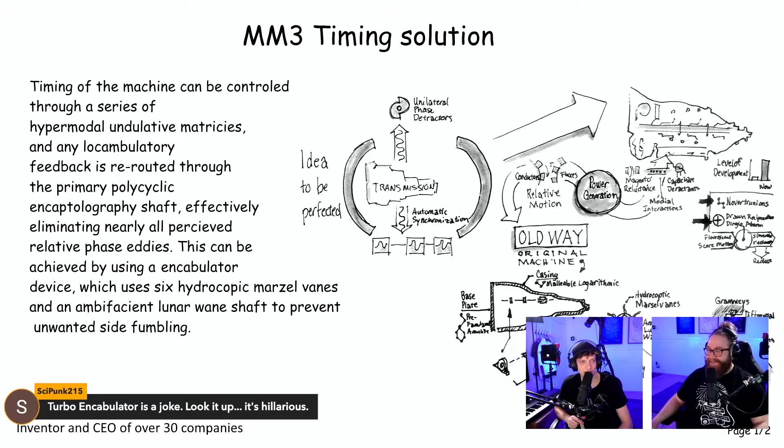People are saying that last one was absolutely trolling. Trolling here? No, it's 100% a troll post, this is an ancient engineering joke. Yeah, I think we have 2 trolling jokes today, which is we both have the submarine solution and we have this. Turbo Encabulator is a joke, look it up, it's hilarious.

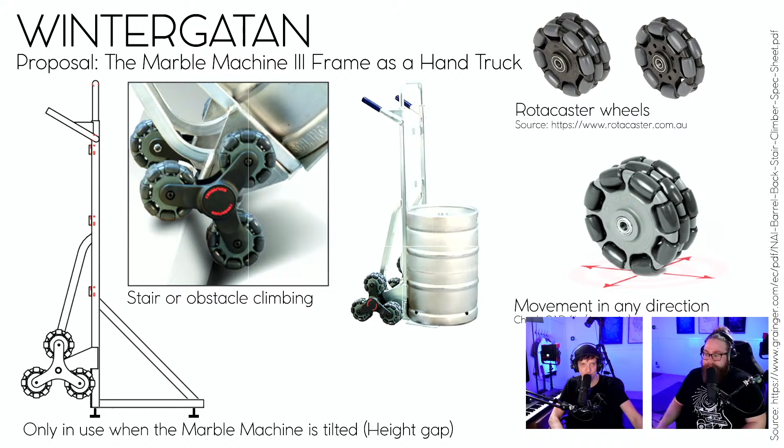Okay, wheels for the machine. Yes, we're gonna have wheels. This is cool though, Wintergatan proposed the Marble Machine 3 frame as a hand truck, and these Rotacaster wheels provide movement in any direction. This is a pretty cool submission, they look so badass. Thanks to whoever sent this in.

We have from Isaac: 1, unnecessary tall; 2, not as strong but could use dummy axle; 3, strongest of all 3 but not too tall, could be in front or slightly up and used as the back brace. It's a good suggestion here from Isaac.

And we have more casters. People love the casters, thanks to Kaysen MC for sending these beautiful casters.

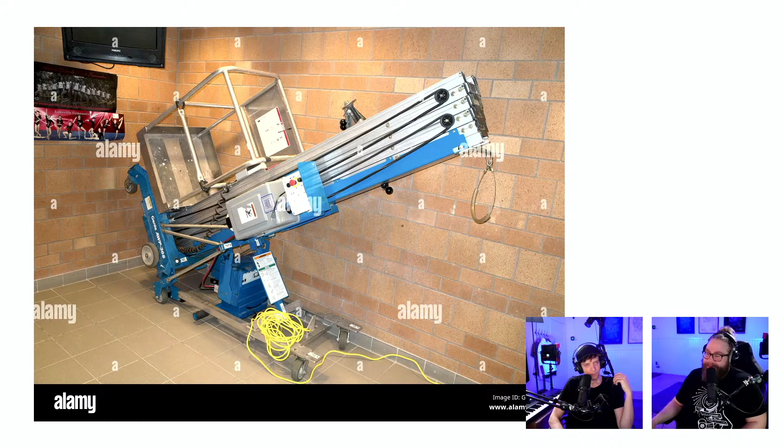And here is some lift of some sort. Wow, that needs to be incorporated. This is actually very relevant, the fact that they're tilting this to get it inside doors. Look at that little hydraulic thing. This is actually maybe super relevant, to have the machine just tiltable, and then the height does not matter anymore. Oh, ba-boom, then it's kind of ba-boom. So if we want to have the all-in-one solution, this would be very helpful.

More casters, and then we have the vibraphone. Okay, let's go to the vibraphone. So these angled plates are problematic because of the rotating shaft underneath. I don't think we can do these angled plates because the vibrato shaft, they have to be on one plane. But thanks for the idea from Anonymous.

Vibraphone Hammer Jammer from Alfonso, who sends in a lot of suggestions, thank you Alfonso. I'd rather play the vibraphones with the marbles direct, it feels too convoluted to have the hammers. I am thinking maybe making a machine with no marbles at all and only using mallets, and Sir 3K has baptized that machine the Mallet Machine.

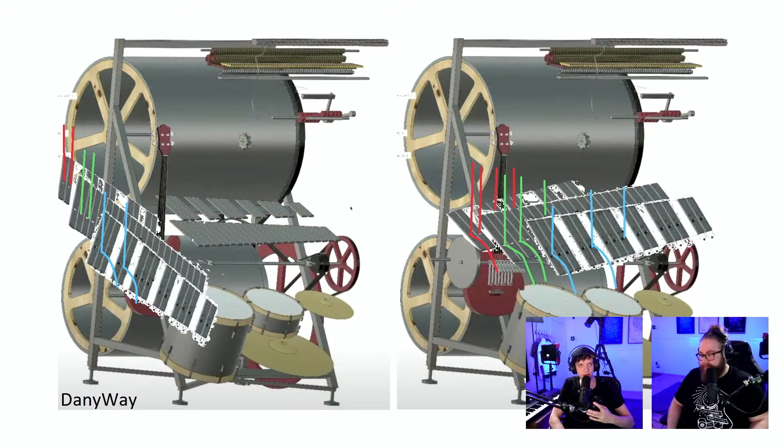So here, moving things to the side from DanyWay, same idea as others have, convoluted but would work, but hard to build. Vibraphone marble collector, oh it's a hammer jammer idea for the vibraphone, same as Alfonso had. And here we'll speed up the registrator, but this idea doesn't speed up the marble release, which is our limiting factor, so it won't make us play faster, but it's a beautiful idea by LS.

And here, Gonsonator's vibraphone spiral, thing of true beauty, thing of true beauty, only how do we put the marble gates for this?

I think this would be very difficult to feed with marbles. And this is one of our favorite sketches of all time, the wide MM3 crafted by Ore.

Have all the instruments laid out as columns, so no overlapping instruments. That's what I mean with the convolution. And you have the marble lift in the middle there. I can play the vibraphone manually, and you can have the snare drum far away on the right, away from the vibraphone. This is probably the most practical thing we can build.

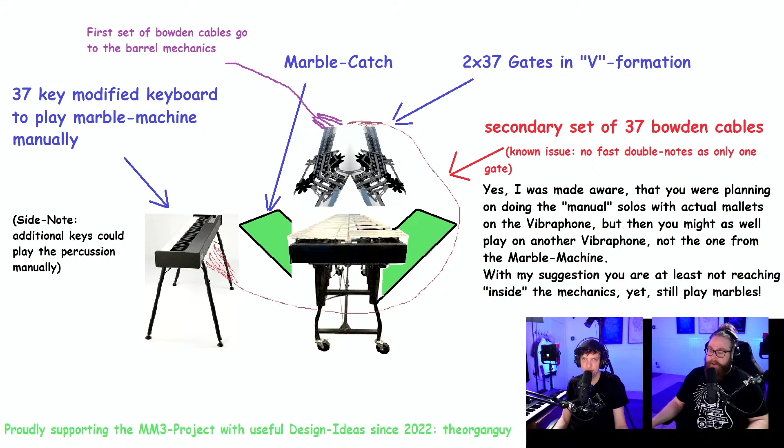Vibraphone requirements. So the big question is, the vibraphone must be manually playable with mallets and marbles, and this is the question mark. In my mind, just because I did it in the first video, I haven't thought so much about this. I think... what do you think, Sir 3K? Marbles? No, this is...

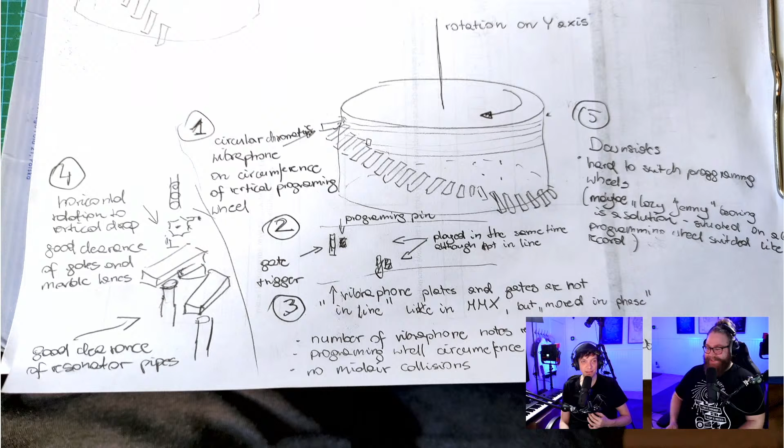Maybe the thing to use marbles is a design requirement. JME, talking about the BPM there. Jean-Miguel Exposito, Wintergatan Live - you misunderstand.

The actual value you measured was about 200 milliseconds and got distracted and entered 400, which you refined to 300. We have to get to the bottom of this. Maybe this is true.

I think I have the document close by here. Let's see, I'm going to try to open it first. Yeah, Hannes, here we go. Let's dig into this controversy. It's a big controversy in the marble universe. So, or was it in...

So it was from this note, 539. So up here, I think my zoom is not going to work. It works too well, yeah, a little bit too well. Wait, if I point it there.

So we're at 525 milliseconds on the first note. And I go to the second note and we're at 856. But this is in 181. I'll leave the comment up there. I didn't do anything, it went away. From itself? No. Let's see if I can find it.

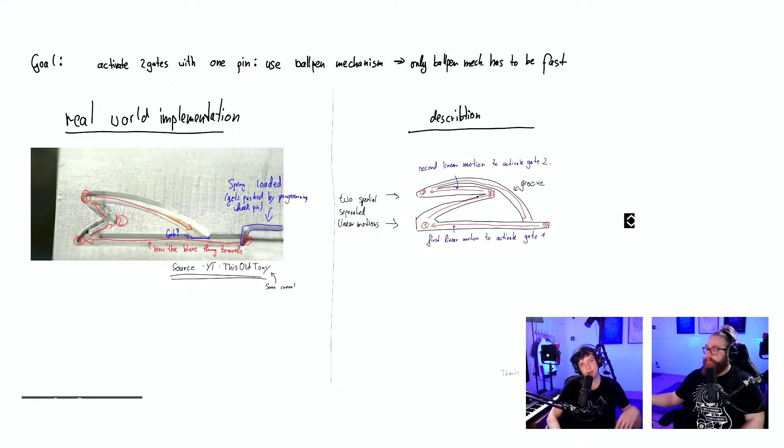Activate 2 gates with 1 pin, use ball pen mechanism. So yeah, so I saw this before. I think it's one of This Old Tony's most coolest videos ever. Only question I have is how would you implement it on the machine?

Yoshi V to main: the interval between semi-quavers. I don't know what that means. 60,000 - yeah, so yeah, I don't.

60,000 milliseconds per minute. Okay, so I think you all are overcomplicating this. I don't still understand here. Often when I talk about timing, we end up in these discussions. Yeah, so please, if you please explain, like with more words, what you mean, because I'm not following.

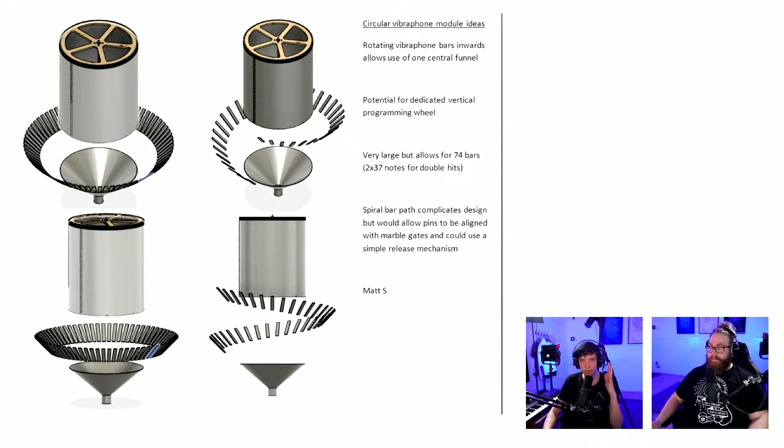16th semi-quavers is 16th notes. Yeah, so again, the thing that I'm checking doesn't matter if it's 16, doesn't matter if it's 8. I'm only measuring in the dimension of time. So yeah, I'm lost on what you mean here. Let's see if you can unlost him.

Matt S. That's a cool sketch, Matt S. Now that the vibraphone is wider, the horizontal space under the bars can be utilized for the resonator pipes. Matt S: I want to use custom resonators from an off-the-shelf machine, even if we cut it apart. So the resonators are going to be straight.

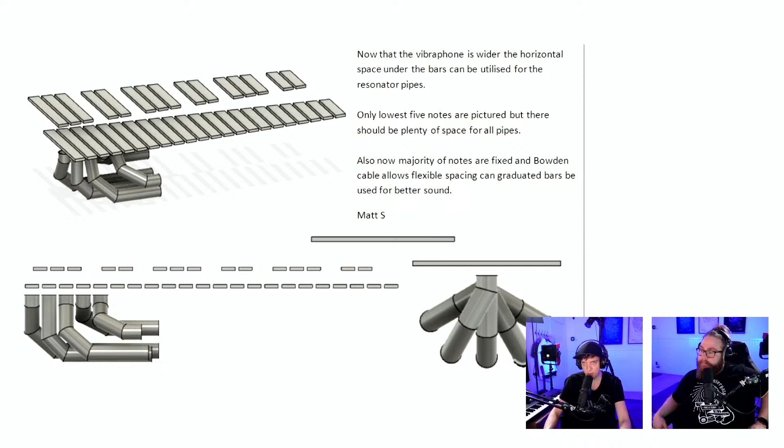By the way, why not enter that as a design requirement? So let's go over to this design requirement and let's add that here. Vibraphone resonators are used from off-the-shelf vibraphone, regardless of implementation. Blah, blah, blah, blah, blah.

Fix the first vibraphone, please - the vibraphone, no, there we go. Okay, next design. Can you switch back? No, I'm reading. Ah, sorry. Angled full-size 2-row vibraphone. This is awesome, with the big, yeah. That's a rock concert right there. Yeah, we're gonna revisit some of these in the footprint stream that we're planning in the future.

This looks like Jean-Michel Jarre, circular keyboard. So Yoshik V to main has a suggestion here: the vibraphone shall be able to play every second semi-quaver. So here...

I really appreciate the engagement in this subject, but what I don't understand is why we are discussing the BPM. The only thing we need to discuss is milliseconds. It's my idea. So the BPM is not needed for this design requirement, because we have triplets, we have other configurations. Here we go, what is this?

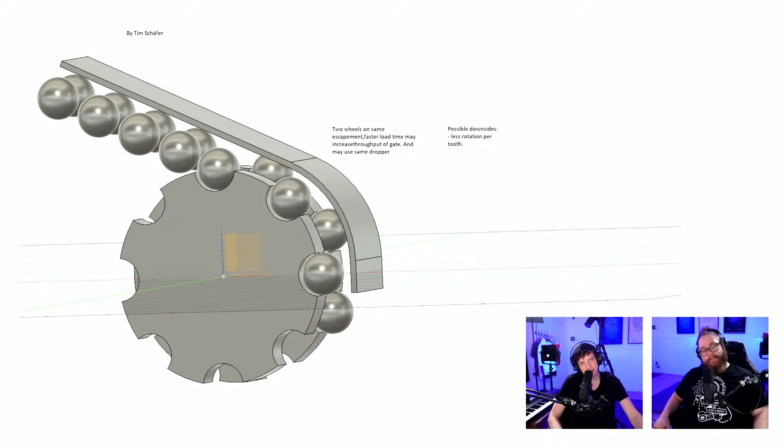The same blanket idea from Tim Schäfer that so many people have, or the protection idea - we went through something similar here. There's too little rotation of this marble drop, so we can't do it that way. But a lot of people have this idea, though it would give a less stable marble release. So we have the resonator pipes between the two drums, and that was an idea we had in the beginning. I don't think we have to do that anymore, which I'm happy for.

Now take it slow, you're on the last one coming up. Is this the last one? Yeah - space enough for the resonator pipes. So, yeah.

This is honestly so much fun, everyone. Just want to thank everyone sending in both chats and suggestions. Thank you all for giving these perspectives.

The big theme of everything we've seen today is that we're trying to solve a problem we don't need to have. Everything is intertwined and on top of each other. We're desperately trying to make the machine we have on the wall behind us work. It's time to move on, perhaps - I don't know. It's time to make something that works, at least. It itches in me when we put everything too close to each other and try to make solutions.

It's the Elon Musk video, less dumb design requirements. This is what I was fighting against constantly on the previous machines. And I think these two machines - the more I'm working on this project, the more hilarious I find it that they look so similar. And I think for the next steps in this process, what I'm going to do now is...